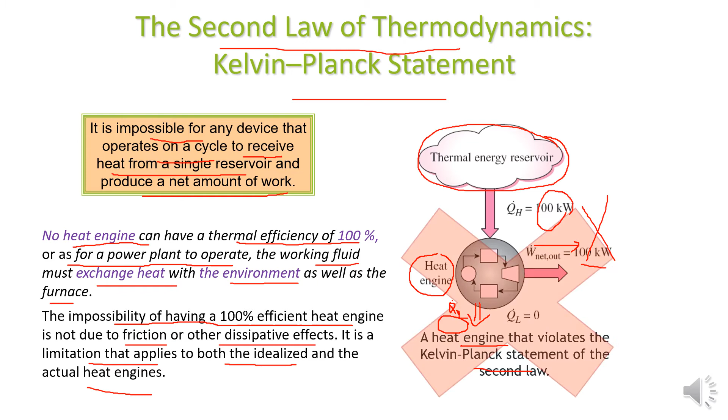Okay, next, the other mechanical devices that convert heat to work or work to heat are heat pumps and also refrigerators and air conditioners. These two devices have a different objective. For example, a heat pump is usually used when you have a colder space outside, and the objective of the heat pump is to supply heat to a warmer space. But for a refrigerator, this is different.

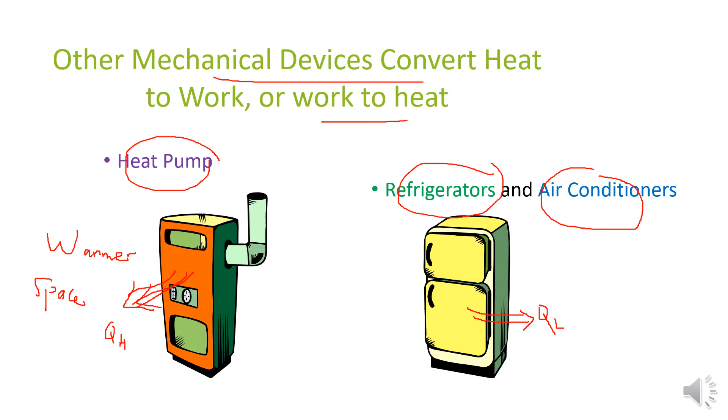But actually, it's the same function. You are removing the heat from inside the refrigerator, which is usually cold, and giving it to the kitchen space. So the refrigerator is taking out the heat from the refrigerator, whereas the heat pump is supplying heat to a warmer space. Okay, let us see the refrigerators and heat pumps.

First, about the refrigerators. The transfer of heat from a low temperature medium to a high temperature one requires special devices called refrigerators. And this refrigerator is like a heat engine. It is a cyclic device. The working fluid used in the refrigeration cycle we usually call refrigerants. And the most frequently used refrigeration cycle is the vapor compression refrigeration cycle.

It transfers heat from low temperature. Initially the refrigerant inside the evaporator, which is usually at very low pressure and low temperature, will absorb heat from the refrigerated space, and then it goes to a compressor. The compressor is operated by electricity, so we have a work in, and the compressor will compress the working fluid. The working fluid pressure will increase, and the temperature will also increase.

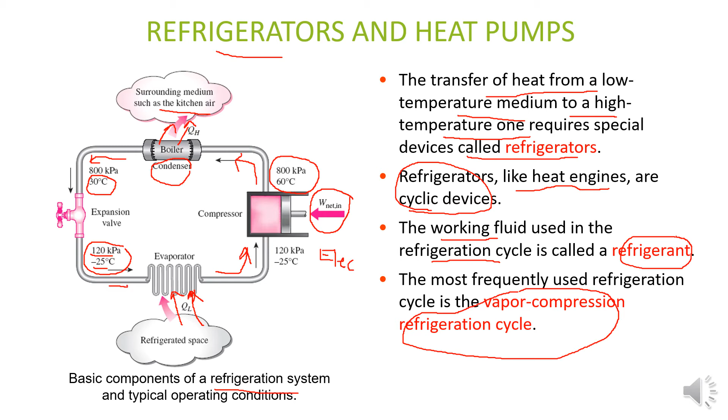Okay, the efficiency of a refrigerator is expressed in terms of COP, or coefficient of performance. In a household refrigerator, the freezer compartment where heat is absorbed by the refrigerant serves as the evaporator. And the coils behind the refrigerator, where heat is dissipated to the kitchen air, serve as the condenser.

The COP for a refrigerator is usually calculated as QL per W net. As we learned, COP or efficiency is desired output divided by required input. So in a refrigerator, the desired output is QL, and the required input is W net. But for a heat pump, the desired output is QH, divided by W net in.

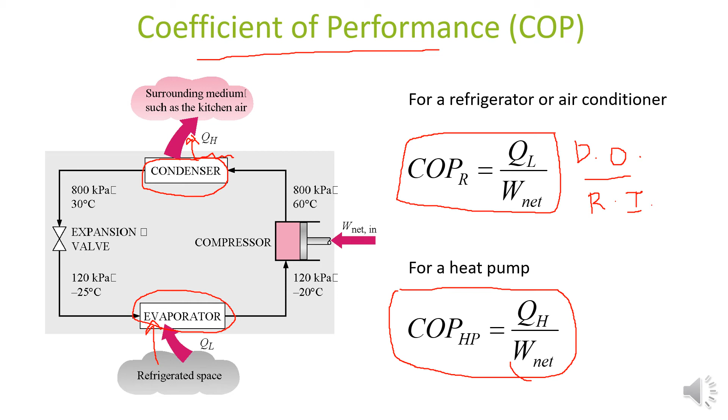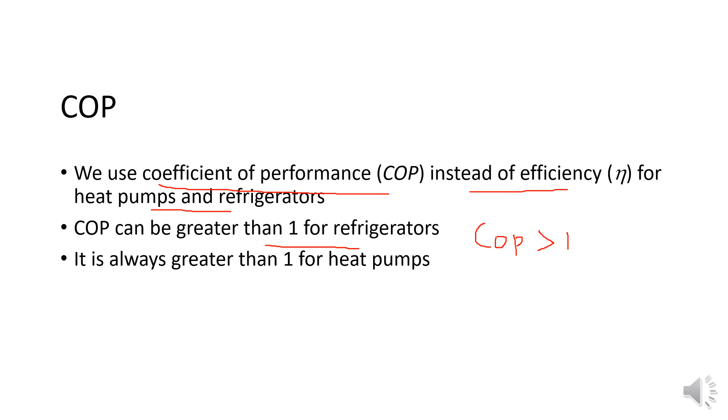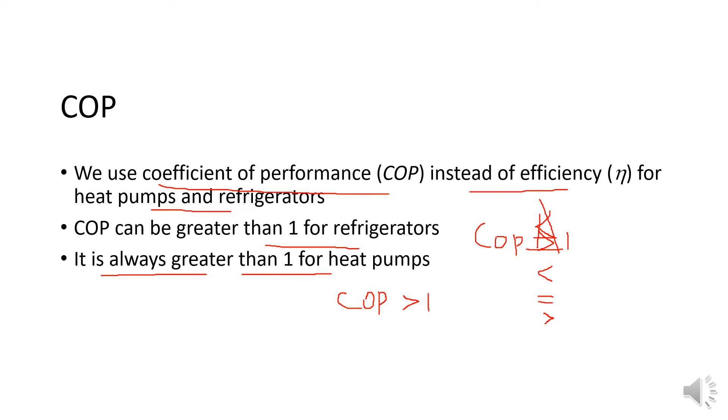Okay, we use COP instead of efficiency for heat pumps and refrigerators. The COP can be greater than 1 for refrigerators, but sometimes it can be less than or equal to 1. But it is always greater than 1 for heat pumps. So for heat pumps, the COP is always greater than 1. For refrigerators, it can be less, it can be equal, but sometimes it can be greater.

Okay, let's see how the COP of a refrigerator can be calculated. As I said just now, QL divided by W net, because the objective of a refrigerator is to remove QL from the cold refrigerated space, and the required input is W net. Also, W net is QH minus QL. So this is where we get the COP of the refrigerator: QL divided by QH minus QL, or the same as 1 over QH/QL minus 1.

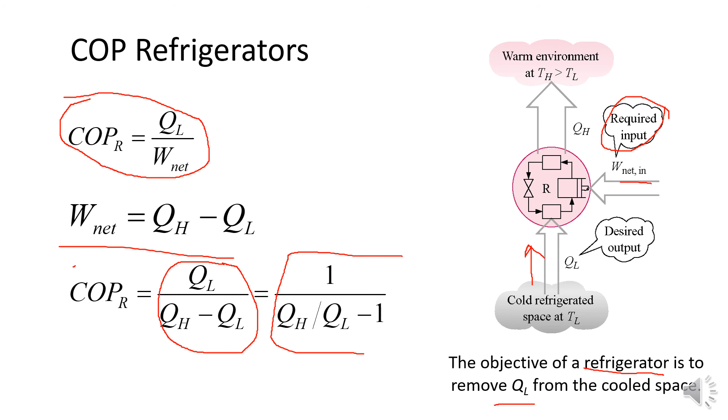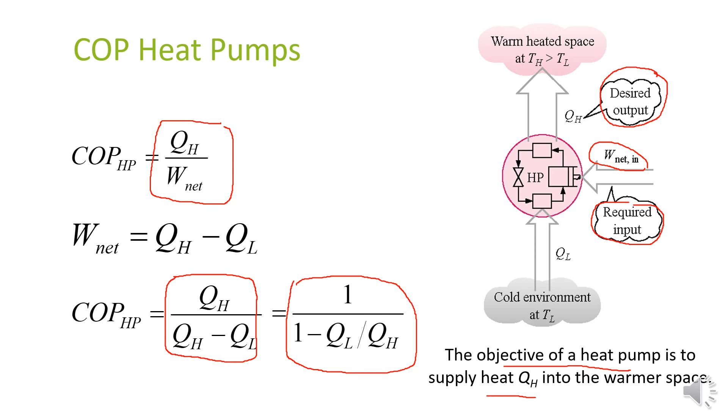For the heat pump it is different, because the objective of a heat pump is to supply QH into the warmer space. So this is the desired output for the heat pump, and the work supplied will be the required input. That is why for the heat pump the COP is QH divided by QH minus QL, or it equals 1 divided by 1 minus QL/QH.

Okay, next is the Clausius statement. After the Kelvin-Planck statement, we have the Clausius statement, saying that it is impossible to construct a device that operates in a cycle and produces no effect other than the transfer of heat from a lower temperature body to a higher temperature body.